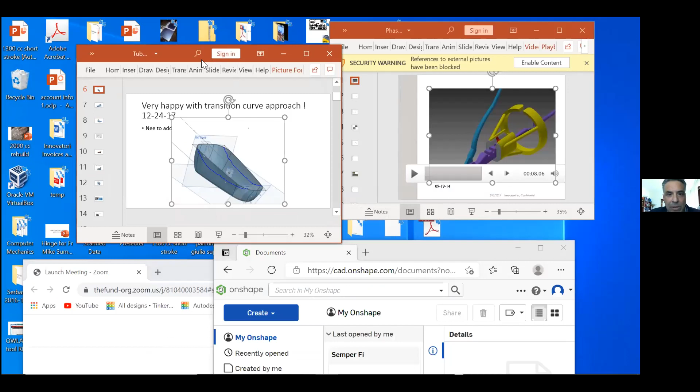backtrack a little bit and talk a little bit about what we mean by CAD design. So this is just, I think I might have shown this presentation during our last talk, but I'm making a copper bathtub for my wife. We're doing the bathroom upstairs, and I used CAD to design the bathtub.

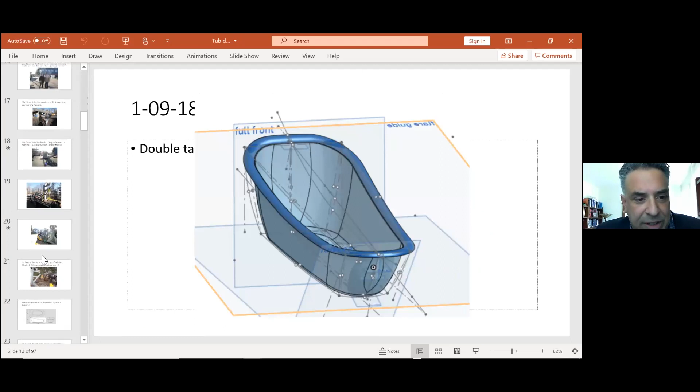I used some of the shaping. I made this 3-dimensional figure of myself to make sure I could fit in the bathtub. And then these are images of getting the design right. Some of this is pretty sophisticated stuff, but we're going to start at the beginning, so don't worry.

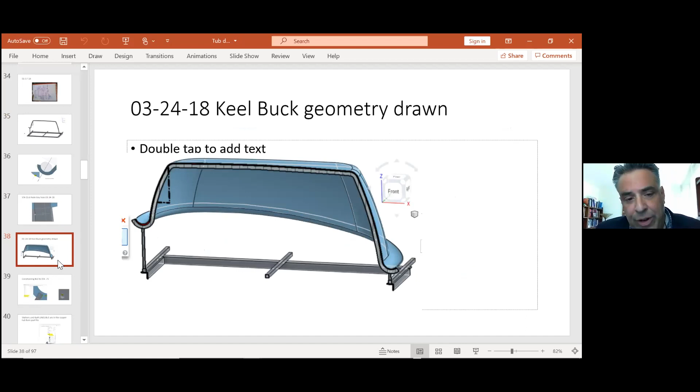I made these full-scale drawings, which ultimately led to the welding up of a frame. CAD can be used professionally, or you could use CAD for your own personal purposes to make stuff - it depends on how much time you want to invest. This is an example of a drawing. Are you folks seeing this stuff pretty well? Okay, that's just an example of getting into the nitty gritty, using CAD to augment the design process, leading to this elaborate weldment.

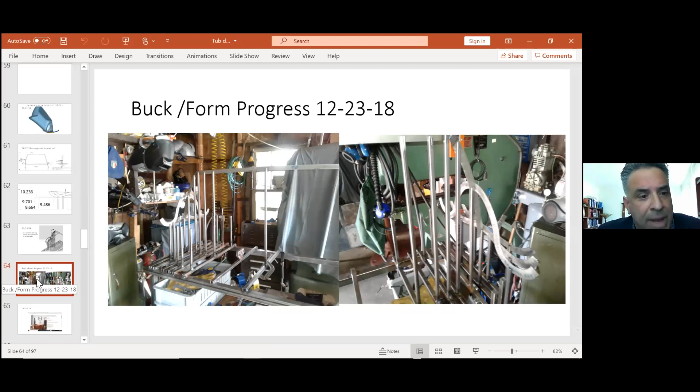Oh, and by the way, maybe in the future if somebody needs to learn to weld - Mr. Meyer, Colonel Meyer, forgive me, indicated that at some point somebody might want to make it up here to the shop to do some training. So all this is on the table. So yeah, an example of, I had an idea in mind, and used CAD to make it happen.

This is the forming of the copper and getting my son involved. So that's just one embodiment of CAD, if you will.

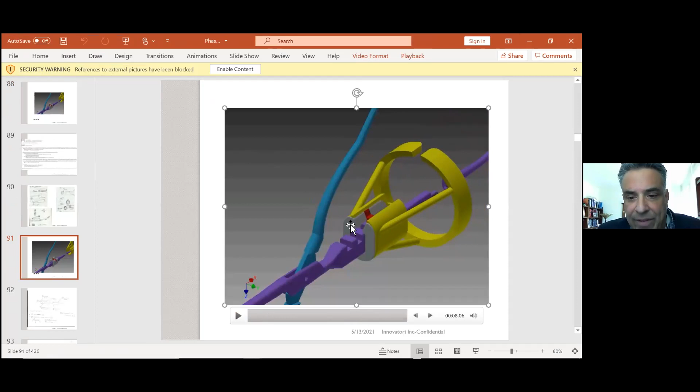And the other thing about CAD is that once you use it, you can then make neat animations. I don't know if this animation is going to actually come through as well as it is on my screen, and I may have shown this before. But the other nice aspect of designing stuff on the computer is that you then have the potential to present it in different ways to convey understanding.

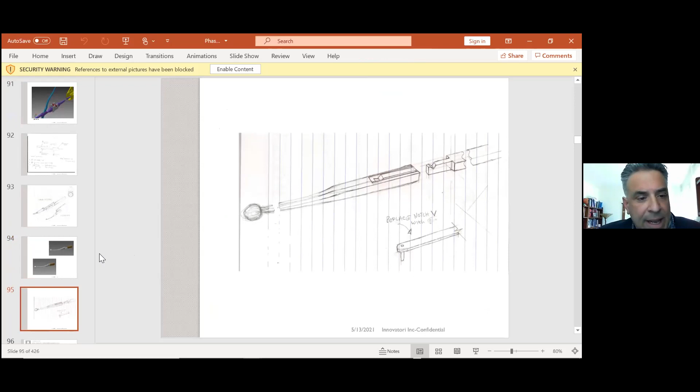John Fortunato mentioned, hey, why don't you show how you go from some hand sketches to CAD. You don't necessarily have to start with CAD - you can sketch things out from your mind's eye, and then get into CAD and make it into something that might be producible. So these are just sketches where I'm conveying concepts, and they ended up making their way into some formal CAD incarnations.

So was that a decent enough introduction? Anybody have any questions?

John Casey here. I think there's obviously you can use CAD to create just about anything, and it doesn't have to be a new invention. It can be a bathtub, something that's been done before, and it's kind of neat to be able to do that. It doesn't necessarily have to be something that makes a lot of money, or be patentable, just something that you get to create. Now there are other skills that go beyond that, but yeah.

Talk a little bit about this Onshape, if you're ready. It looks like you have it pulled up. Okay, so I imagine you see my screen here. There's this Onshape application, and I invite anyone who went through the trouble of signing up - it's a really neat application, and it's free. It's cloud-based and loads directly in the browser, so there's no installation. All you have to do is go to onshape.com and sign up for a free account.

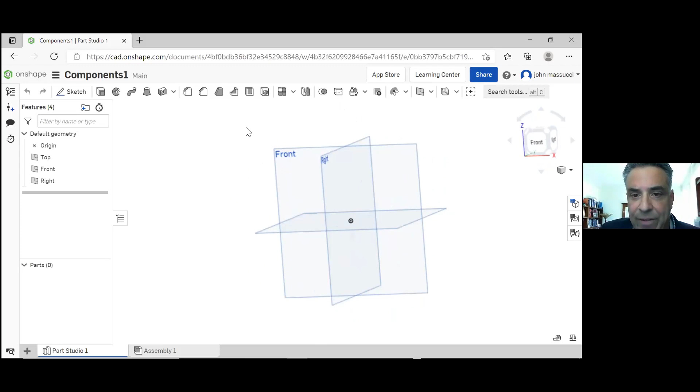Then you can click on, if you move over to the right, you can click on front and it'll automatically get you back to the front view. Then you can right click and get to this top view, and you'll see how useful this becomes.

And then the other mouse features - if you have a dial on a mouse, a wheel function, it allows you to do a zoom, just to manipulate what we're about to draw.

So in CAD, you sort of start out with a sketch and apply it to a plane, because generally in CAD, at least initially, you're drawing in 2 dimensions. So what I'm going to do is go over to the sketch function here.

Can everyone see my cursor? I'm circling around here, and I'm going to click on sketch, and it's asking me for a sketch plane. So I'm going to click the front sketch plane. You'll see what it does - I'll zoom out - it puts a sketch plane on top of the front plane.

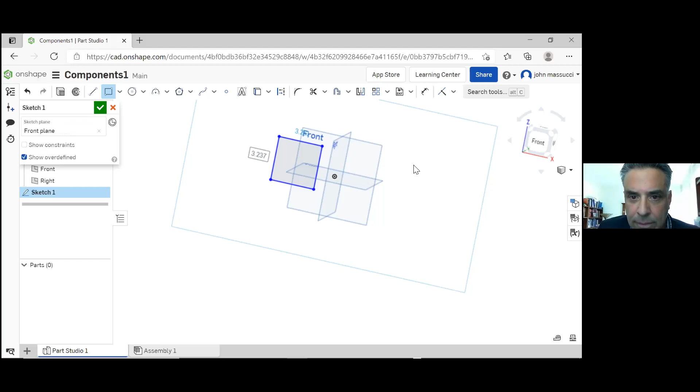So, yeah John, I don't know, maybe you were gonna mention it. There's that idea that once you're logged in, at the top on the right hand side next to your name, you've got the Learning Center and the App Store. Oh, yeah, I completely forgot about that. Yeah, we could go there right now.

By the way, we're going to step through some steps, but if you click on the Learning Center here, it'll bring you to this pretty elaborate Learning Center. My network connection seems slower than it was earlier this morning, but this is a pretty amazing spot, because you click on these, like these self-paced courses, and there's everything under the sun that you might be interested in learning.

So if there's one useful thing we can do on this call, it's to point you to Onshape, and the second most useful thing might be to point you to this Learning Center. You click on this Part Design Using Part Studios course, and it has this whole suite of videos that will walk you through the design process, discussing some of the individual part models and features.

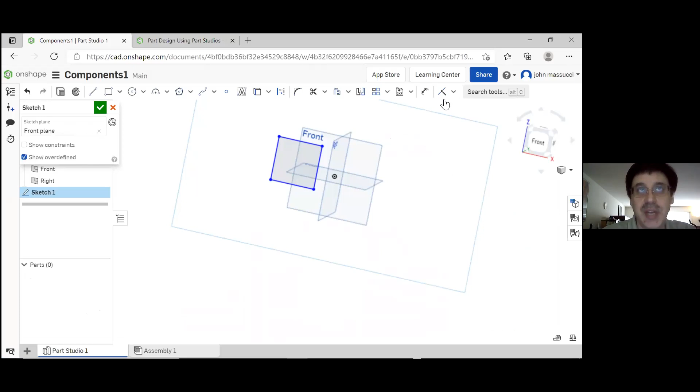Yeah, there's a lot of information there, and there's also instructor-led courses available as well. So if you're looking for some assistance, it's probably available within the Learning Center.

And so if we could then jump back to where I am here. Using your mouse, to center, if you ever get kind of lost, you can always click front, and that'll zoom everything to where you need it.

And then just remember, I have a couple button mouse, but it's just a simple right click that enables you to rotate. If you get into this front view, I kind of always like to look from a perspective standpoint.

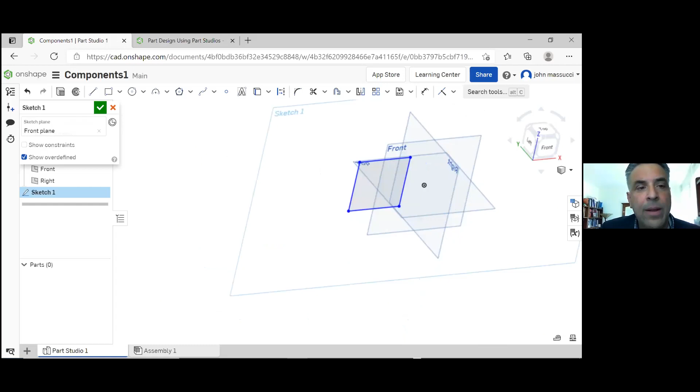Okay, so we drew this square on the sketch. The first thing you might want to do when you have this basic geometry is to add dimensions to it. So I click on this dimension icon - it looks kind of like a dimension - and then I select the line that I want to give a dimension to, and it'll pull out. That's the dimension that defines the square I drew.

But when it's highlighted like that, I can make it whatever dimension I'd like. So I'll just say I want to make this 3 inches. And then, while this is still highlighted, the dimension icon is still active, I can click this and make it into, maybe we'll call it 3 by 5.

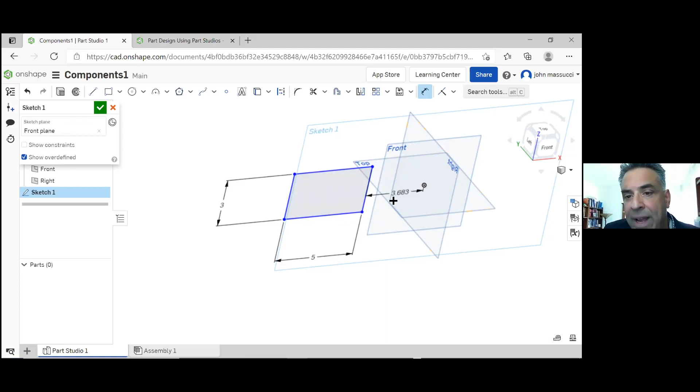I can unhighlight the dimension box, and I can move this in the direction that I would like to move it, by picking different pieces. And I can add some dimensions to locate this cross section. So I could dimension to this fixed point, which may ultimately be important at some point.

John usually explains this much better than me - he was pretty good at it earlier this morning - but I'm basically establishing the location of the cross section to a zero point, so that if I come back into the sketch, which we'll see, I can change the dimensions and the shape will react in the way that I expect.

Okay, so you notice how what was blue is now all black, and what that means is that my sketch is fully constrained. I have a fully constrained sketch, meaning all the dimensions are there, and the sketch makes sense. So then I can click my green arrow and say that I'm done.

And what I've done is I've added to my design tree over here to my left - I've created this sketch, and it's called Sketch 1. I could right click it and rename it, and I could call it 'sketch of part'.

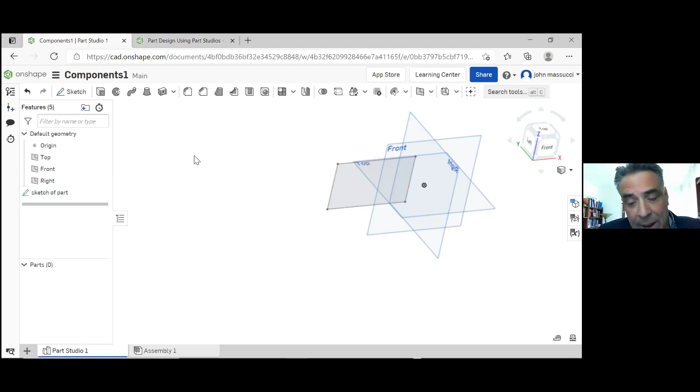Okay, so you've got this sketch now. Here's probably one of the most fundamental aspects of CAD: the ability to take a sketch and turn it into 3D. When you mention CAD these days, there was a time when everything was still 2D, like architectural drafting, but today when you say CAD, they generally mean three dimensions.

So we select this extrude tool, and this dialog box opens up. Further down the line maybe we can get into all kinds of exotic surfacing and what all this stuff means, but fundamentally we want to make a solid out of this cross section we've created. I'm going to select the cross section, because the box asks for faces and sketch regions to extrude, so it's asking me for a region that I want to extrude.

So I select that region, and you'll see it's giving me a premonition of what it intends to do. I can change that, I can flip the direction if I'd like, I can change the depth. I can say I'd like this to be on the order of 5 inches, and I'll hit enter and it'll update by extrusion.

It gives me a bunch of options which I'm not going to go into right now because they're not all that important in an introductory class. But for instance, I could select draft and give it some value, if I was making a cast part and needed to include draft on all my bodies so they could be removed easily from the mold. That's just an example of some of the options they give you, but in this instance I'm not interested in including any draft.

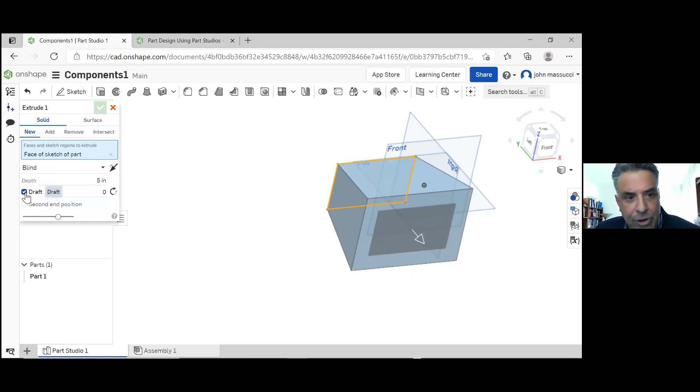So I'm done, I made this simple part. I've extruded it, and it's in my document called Components 1, and here it is, and I can rotate around. Anybody have any questions? Have I lost anybody? Anybody want me to go back?

There's been a few questions and comments in the chat, and I'm taking care of responding to those. Oh, that's awesome, I'm not sure why I don't see it. You have to pick the chat button and it pops up and then it'll be shown on your screen, so you're probably better off just leaving it minimized. Okay, great, that's good because I'm on this little tiny surface screen.

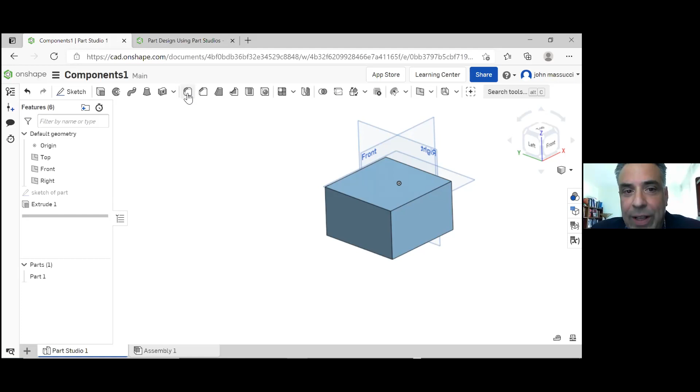Okay, so I've got this extrusion. Big deal, you drew a box and you extruded it. And that's great. Now there's a whole suite of options you can do with this solid. For instance, I could just click this fillet button and select these edges, and it'll put a fillet on the edges. That might be really important if I'm designing, say, a cigar holder, and I want to put some fillets here, and eventually we're going to put a cavity in this thing.

So there's a bunch of options which we'll at some point go through. When you play around with it, you'll see what they do. I just wanted to add some additional geometry, and then when I'm done I'll just click, yeah.

Let me point out, in this design tree you'll have a list of all the things you've done, and you can always go back and change things. I can go back to this extrusion, click on it, and it'll come up, and I can always change it. That's one of the beauties of CAD: I'm not constrained to what I've already done. I can always go back and change things and shapes. I can go back to this fillet radius and change it from 0.2 to 0.7, and there you go, I can update my design.

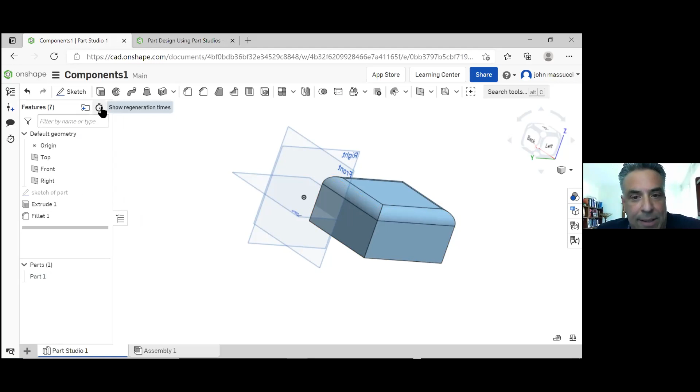Let's say maybe we want to add a hole to this shape. So I go back to my sketch function and select this surface that I intend to put my hole on. Now I'm in the sketch selection mode, and since I'm in sketch mode, this pull-down bar has the options I'm generally concerned with when drawing sketches.

I'm going to select this point and try to locate it. I'm going to put this point somewhere—I'd like to put it in the center. The one thing I can do is, well, let me not, I'm going to try to just keep it simple here.

One thing I can do before I put the point down is use some of the existing geometry to locate the point.

So I'll click on this icon, called project, and what it'll do is project these lines onto my sketch so I could use them to reference the center. Hopefully that makes sense.

Another thing too, right John? You can project anything from within the sketch. You could project something on the bottom of your current block, even if you had another piece of geometry, you could project that. You're basically just projecting some geometric edge or surface back to the sketch plane.

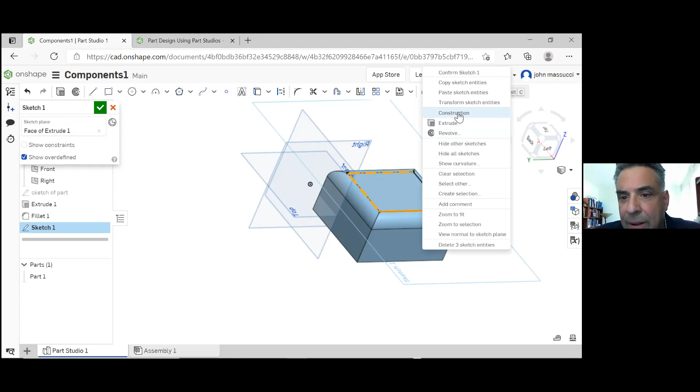I could potentially be complicating this concept a bit, so forgive me, but I just projected some existing geometry and then right-clicked them and turned them into construction lines, so that when I extrude later on to make the hole, they don't end up becoming part of the geometry I'm really concerned about.

But now I want to put that point in the center, right, so there it is. And then what I wanted to do is make sure it was in the center, right?

So what we're going to do is constrain it in a vertical sense, right? This guy, and the midpoint should just pop up, but no, it's not.

Okay, so what I'm going to do, you have to put another point at... yeah, I was hoping to not have to do that, but okay. So I'm selecting,

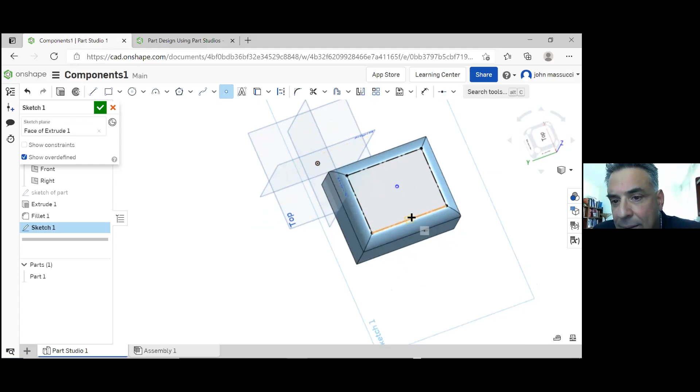I'm going to put another point here, in the middle. So I'm highlighting this line and putting a point there in the center. And that's now, if I show my constraints, this is telling me that this point here is in the center.

And then I can constrain vertically this point to this point, and that'll put— you probably wanted to go horizontal, John, because you're— yeah. Hold on, just undo that. Yep, yeah.

I hope there's a simpler way to do this, but anyway, so I'm putting two points on these construction lines, and I'm ensuring that I'm getting to the center.

I probably should have just put the hole in without worrying about constraining it to the center, but maybe this is useful, so I'm constraining it.

So now what I've actually done is geometrically constrained this point to the absolute center of this guy.

Maybe I'll be apologizing too much, there's probably an easier way to convey this. But anyway, what I wanted to do was put this point and force it.

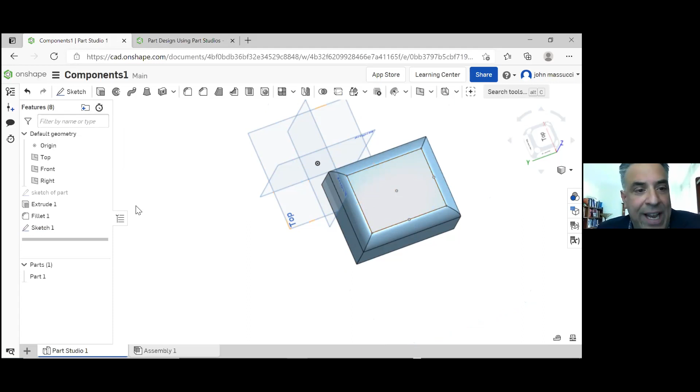So now the thing I can point out is, because I've geometrically constrained this point to the center, if I go and change the dimensions of my object, if I go back to the original sketch and change this dimension to something other than what it was...

So if we can make it 2, let's say, right? And then I go back and you'll see that, okay, but you notice how that point stayed in the center.

And so that's a very useful— that's like one of the most important things to convey about designing in CAD, that you can set up these relationships that are core to your design, and then go in and tweak the design.

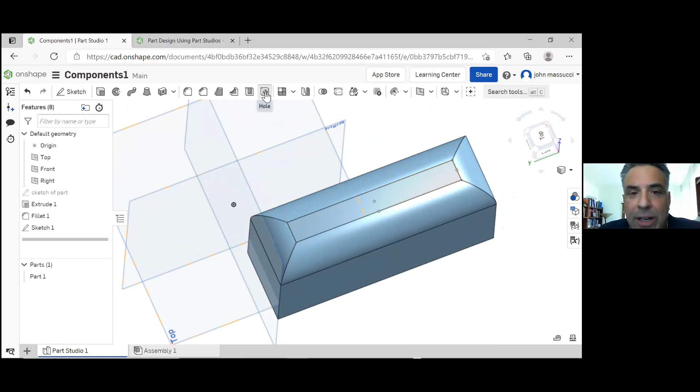Okay, so we started out wanting to put a hole in the center. So I'll click on this icon now, and you can see down here it's asking for a sketch point to place the hole.

So I'm going to select the point that I intended to put the hole there, and I'll select it, and there you go. It put this— it's expecting this kind of bolt or screw geometry, and I can change that.

Right now it's asking for a clearance hole. It could be a tapped hole, it could be a simple drilled hole, which I think only limits the options for drill sizes. But we'll call it a simple clearance hole, and it's got this geometry, so we'll leave it at that.

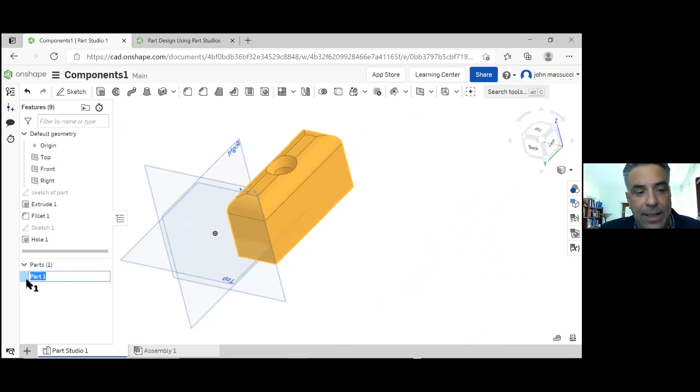So I've created my part. I put a hole in there. I'm going to maybe bolt that together. Right now I'm in this document called components, and I've created my part. I could rename this. Any ideas? We'll just call this bracket. Bracket 1, maybe, okay.

And then I can create another part. For simplicity's sake, we'll create something cylindrical and we'll constrain it at some point, because we're going to make an assembly. Right now we're creating parts and they're ultimately going to end up in an assembly. So we'll go back to our sketch tool.

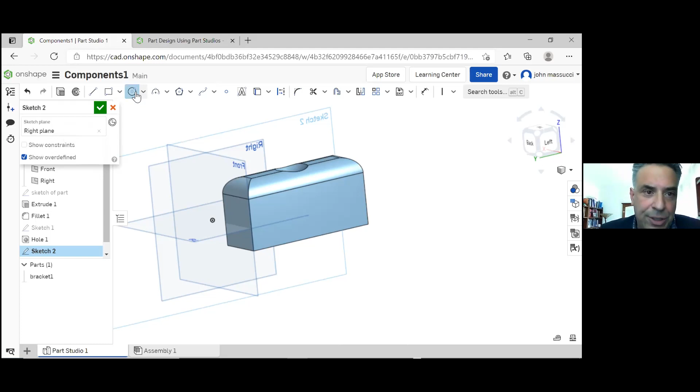Okay, and I'll select a different plane, let's say, and select this, and then I'll select my circle tool. I'm now in the sketch and I'll put a circle somewhere. Okay, and then I'm going to go over to my dimension tool here again, and I'm going to put my dimension here, and maybe make this a 2-inch or maybe 3-inch diameter circle. And I'll click OK.

And I'm going to extrude that again. And I'm going to select my circle. And now I've got this cylindrical looking device. I can flip it. I can change the depth. Whatever I want to do. And then I can click OK.

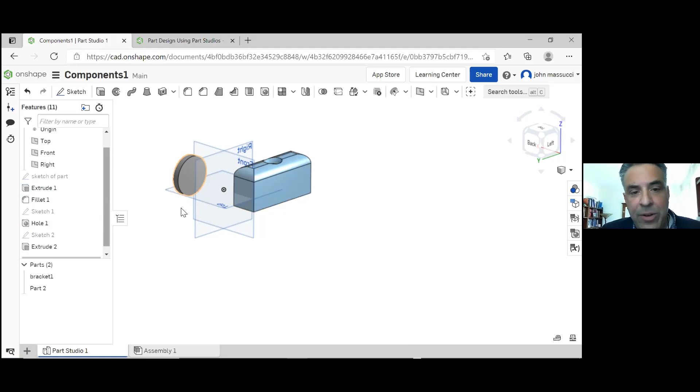Now, if you notice, my tree here on the left, my design tree, has all the different features that I've done. And at any point, I can go back and change things. But notice now I have 2 bodies. I named one bracket, but because this cylindrical disk is a closed volume, the CAD software recognizes it as a separate body.

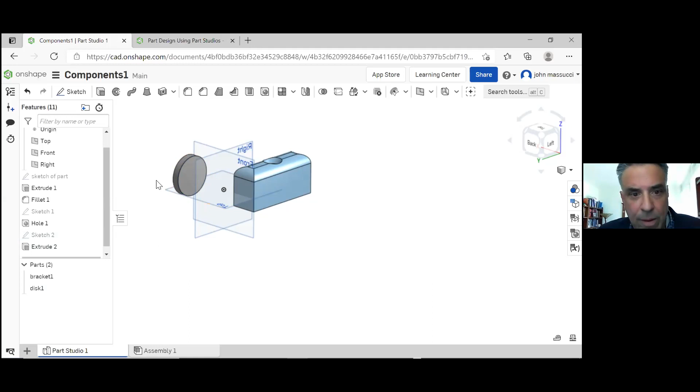And I can click on this and rename it, and I can call it disk, disk 1 maybe. And if I wanted to make this into one piece, let's say, I can highlight the body. Let me hide the sketch.

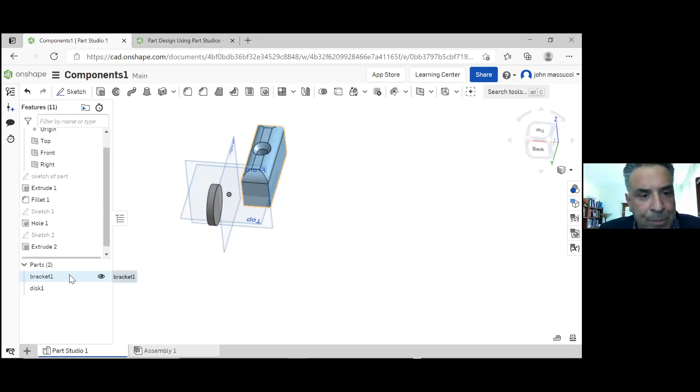What I'd like to do is move the sketch into position where it's likely to intersect. We'll go back to the sketch, and I'm going to move this guy over a bit, and then hit OK. And I'm going to just demonstrate a feature.

I'm going to go back to the extrusion. I'm going to make it a little bit longer, maybe flip the direction, and make it 1 inch long because I want it to intersect my geometry. Let's see, is it going to intersect yet? 1 inch. Maybe make it a little bit longer just to make sure.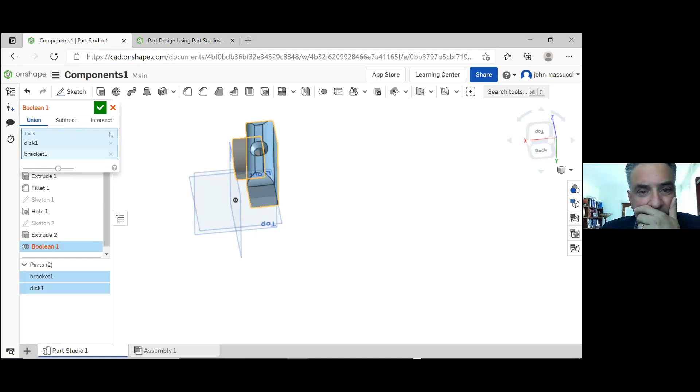I'm going to make it 2 inches, let's say. Okay, so it's clear that these 2 bodies are intersecting each other. You can tell, see that in the hole, but they're 2 separate parts. I can click here, go to this Boolean feature, and then choose a union. And so I can union these guys together, and now it's 1 part.

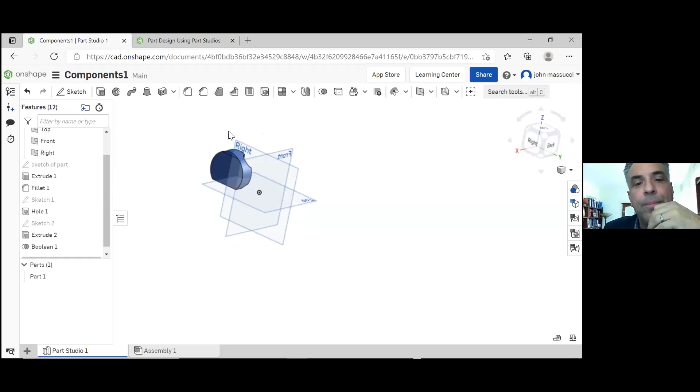See, now I went from 2 parts, and it's effectively 1 part. Just to conceptualize, what I could also do is a subtraction between those 2, or maybe even better, an intersection. Isn't that interesting? So it's kind of an interesting concept, this Boolean operations, where I can create a single part that's a function of two different parts. It ends up becoming really, really useful. And these things become quite familiar to you as you're using CAD.

But I'm going to delete this feature, and you'll see I'll go right back to my two parts. And I'm going to turn this back to only 1/2 inch in width, because really what I want to jump to now is getting to an assembly, because now I've got my two parts. I've got a disc, and I've got this other geometry, if you will. And so I'm in this part studio.

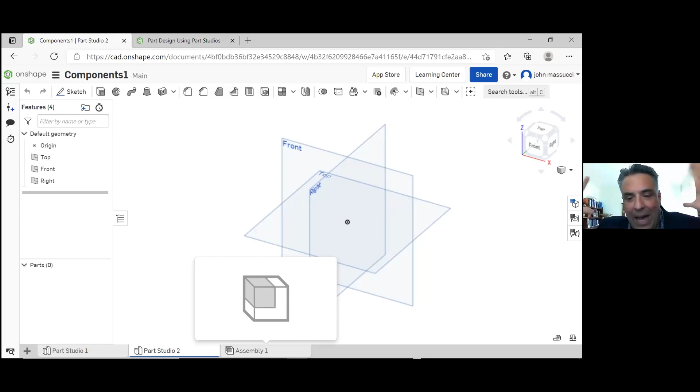I could add other part studios, right? I could create this other part studio, and you'll see that it'll bring me to this blank page. So there's Part Studio 2 and Part Studio 1, and there's assemblies, and then there's the components. One thing about Onshape is that it's very wide. You have a lot of ways to think about how you want to structure your design. That's a little bit of a more advanced concept, so I'll just throw that out there, that you've got these part studios, and we're going to get to an assembly. Then you've got this components that has a couple of parts in it. And then you've got this folder that could have a number of components.

So, I don't intend to confuse anybody. I know I'd find it confusing myself if I hadn't been doing this for a while, but I don't find it confusing anymore. Initially it's like, wait a minute, I can have components in a folder, multiple folders, multiple parts in a part studio. The most important thing is not to worry too much about that. Onshape, in contrast to other designs, makes things much more flexible.

Other programs have assembly files and part files, and that's about it. In some ways that makes life a little easier, but as you get more sophisticated, you can do funky things like share parts and features, join them together. I've got gears with tooth profiles I want to borrow from, and it gets really interesting. You'll find the method that works best for you.

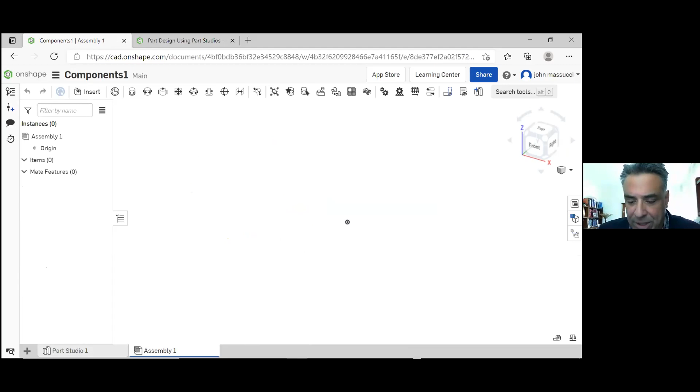Many times, let's say somebody's designing something like a piece of artwork with some kinematics and movement, or you just want to put something together - maybe it's two parts and some bolts. The reason I'm stepping back to call attention to parts and assembly is that it's a fundamental language to CAD: I've got an assembly and I've got parts, and basically the process is to insert your parts from the stuff you've created.

By the way, when you're in Onshape, you never have to worry about saving anything, or where the stuff is. It's just always there, always on the cloud. It's one of the most beautiful things about Onshape - you never worry, did I lose it? Did I lose that configuration from 3 days ago? Did I save it in the right place? It's just always there. It's a really wonderful feature.

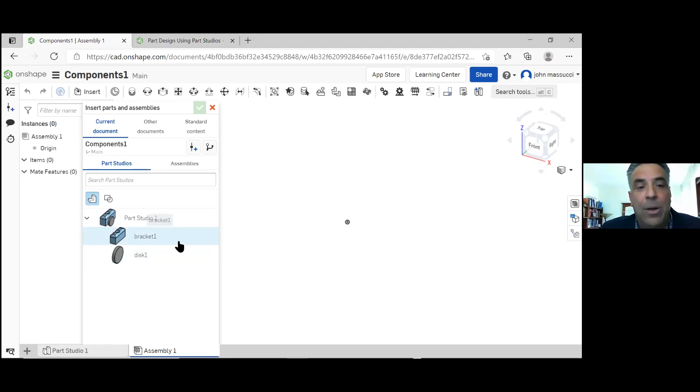But anyway, getting back to the assembly, I'm going to insert the bracket, and click OK. So now you'll see I'm in this assembly, and I've got this bracket. I only have one, but maybe I want to insert it again because I'm going to use the bracket twice in my assembly, and put this guy here. Okay, so now I've got an assembly, and I can rename this, right?

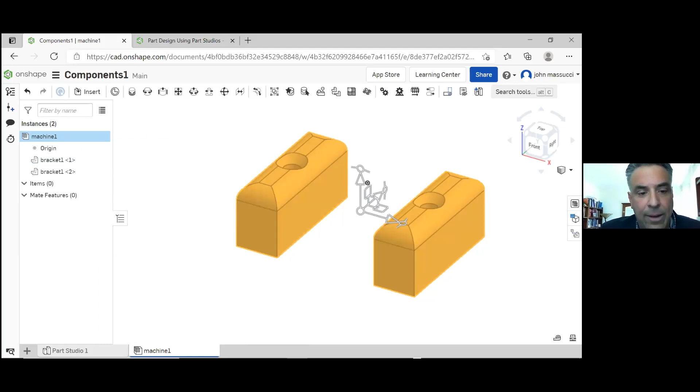I can call it - we'll call it machine one, right? And you can see the name updates here below. And I can always go between my part studio, where I've generated my parts, and my machine one assembly.

So now what I want to do is orient this other part so that it's sort of in a mating relationship, because I'm going to put that cylindrical piece in the center. So what I'd like to do is mate - I'm going to fasten.

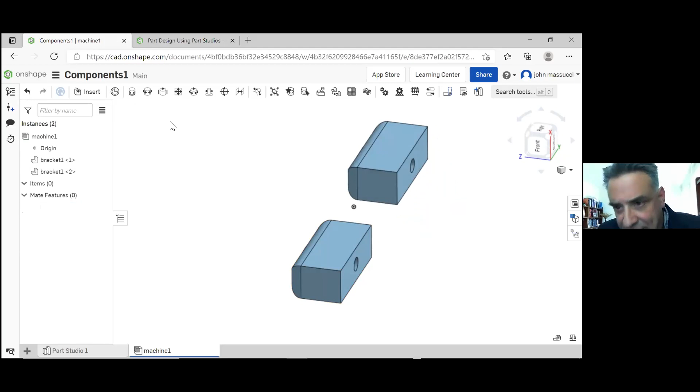Actually, before I do that, I'd like to show that these are not constrained. So I'm going to be adding some constraints to my assembly so it goes together the way I'd like. But before I add constraints, I want to point out that I can move these things any way I want, because they're not constrained - I can rotate this stuff and make animations, because right now they're just sitting in space, constrained only to the space we're working in.

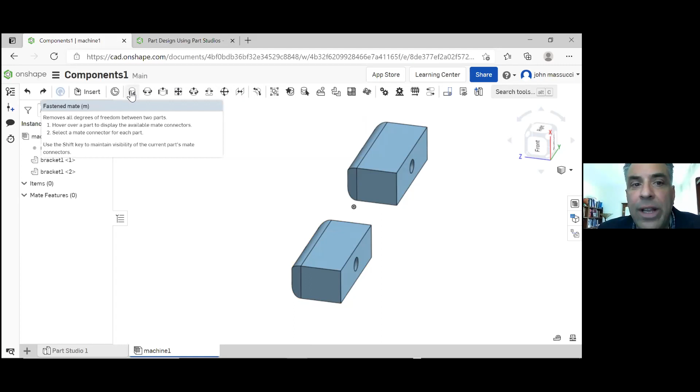Okay, but I'd like to constrain this face, geometrically speaking, to be parallel or opposite this face. To be honest, it takes a while to understand all these constraints - there are a lot of great videos on it. When it's been a while I tend to forget how each one operates, but let's hope I get it right. I basically want to constrain this circle here to this one.

Notice how it put it exactly where I wanted, but not quite oriented the way that I need it to be. So I click this arrow and it creates that mirror orientation that I was looking for. So that's pretty, right?

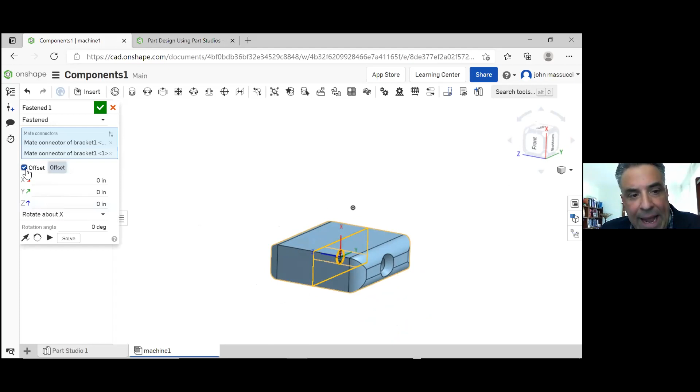Now I've got this roughly the way that I intended it to be. However, I need them separated. So I'll go back to this fastened constraint and click this offset, and I'll see this blue arrow here. That blue arrow says Z, telling me that's the Z direction, the X, Y, Z in my three-dimensional space.

So I'll go over to Z and put in some number like 3 inches, and flip it so that... let's see, one second. I've got to put -3 there, right? And then I'll flip it again. Fasten, -3, and flip that, and then we should be good.

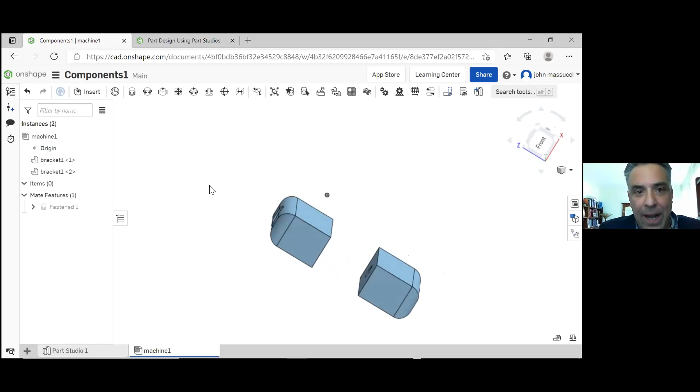It definitely will take time, when you work with constraints, in your mind's eye it may seem, hey, all I want to do is arrange these parts, but getting the constraints to behave the way that you want takes some playing around. They've done their best to kind of describe how these constraints work.

So now that these parts are constrained to each other, if I click on the part and try to move them, you'll notice they move together, because they're constrained. So if I click this arrow and move them, you'll see that now they kind of move together.

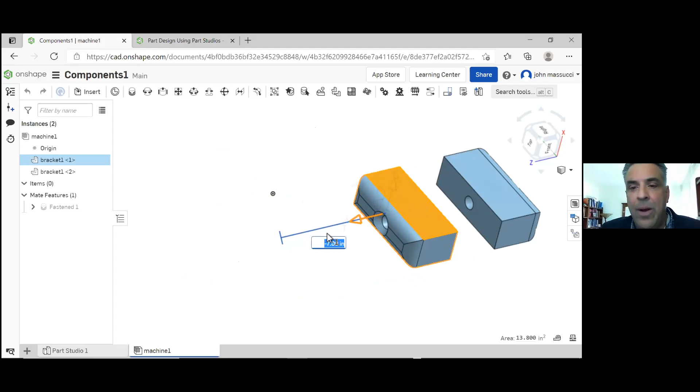If we were on site, in some kind of classroom, which hopefully one day that might happen, or if you were here for a week or so, I could be looking over your shoulder and helping you along the way. But we're doing our best here with Zoom. I'd suggest going to the Learning Center and doing the making a part, making an assembly exercises, and if some concepts are still eluding you, we can probably schedule some subsequent Zoom calls to go over questions or direct contact.

So here now, we also made this disc. I'm going to insert this disc into the assembly, okay? And I'm gonna just use one of them for the moment. I'd like to put this disc, let's say, in the center here, in between these two. So I'm gonna try to make it simple for myself.

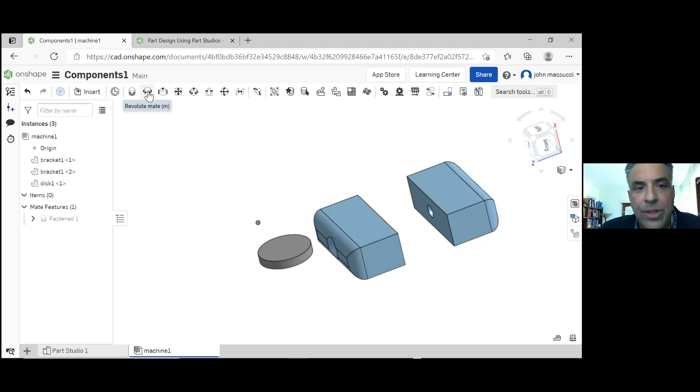I think if I use this revolute, that gives me an offset. Does that give me an offset? Yeah. So I can select the center of this, select this circle, and select this circle. See, it'll put it concentric with that circle, and then I can give it an offset of maybe 1.5 inches, and that should put it in the center there.

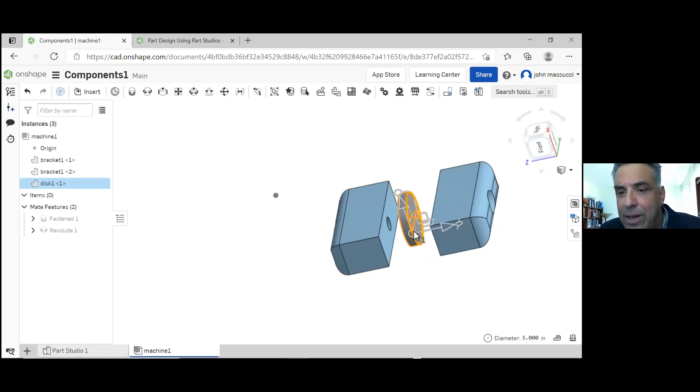Okay, and maybe there's a shaft that's going to go... so now I'm in this assembly, but let's say, oh, I forgot to put a hole. I can click on this, double click on this guy, and maybe right click. And I think there's an option to...

See this option, edit in context. So I can click this option. Don't worry if you don't follow it right away, but I can edit. So what I'm doing is editing this part in the context of my assembly. And I can throw a sketch on there, because now I know where my hole needs to be, and then project this geometry from this other part.

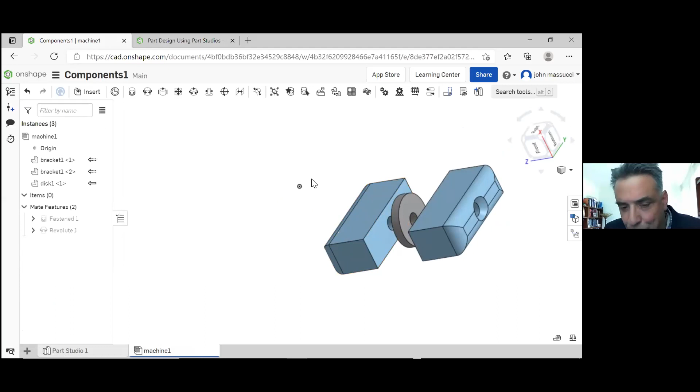See how it puts a circle there right where I need it, and then I can actually put a hole there, and I can remove, and click OK. I'm going really fast, don't worry about it. Then I can go back to my assembly, and you'll see it ends up being a really powerful feature. While I'm in an assembly, I can locate other geometry that's pretty important to what I'm trying to achieve with my assembly.

Okay, so I've got this pretty simple assembly. I might want to add a couple of fillets. One thing I'll point out is I can still move this assembly all over the place.

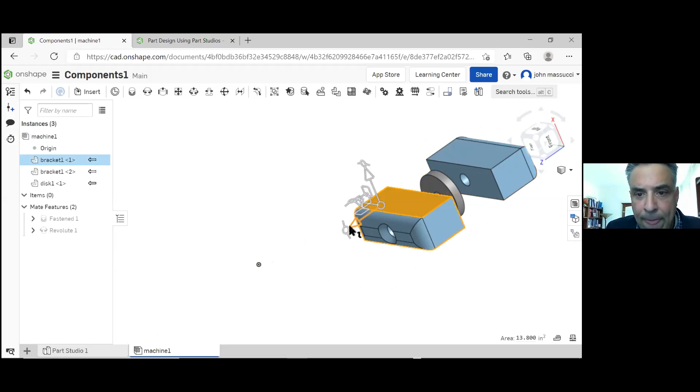That's interesting. Oh, because I'm back to the assembly. Oh, there was just too much of a delay.

So the point I was just trying to show is that this assembly is not yet really anchored to anything. The other option you have, and it's not the most important thing to show at this moment, but there may come a time when you need to fix a part so that it's constrained to ground, if you will, effectively as if it's constrained to earth.

And if you notice, I selected, and it puts this ground feature next to this part. And now I can't translate this part anymore. No matter what I do, if I try to rotate this part, it doesn't move anywhere.

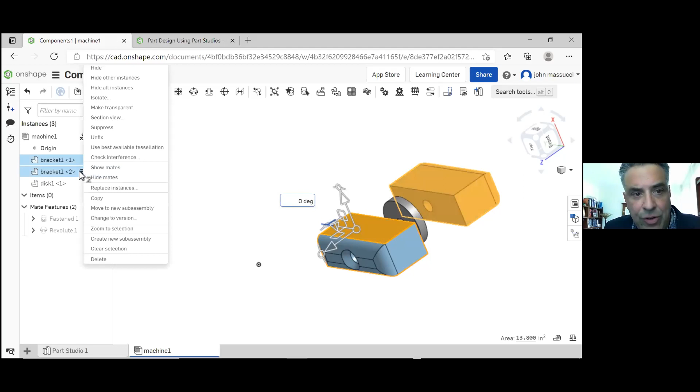But if I was to remove the fixed constraint, if I click unfix and I clicked on it, you'll notice that I can rotate, I begin to rotate this thing. Just a point of,

now we're going to get into, well, okay, now that, okay, John, you've showed me how to make a couple of parts and put them in assembly, big deal. I'm going to learn this in a couple of hours.

So now what we're going to do is we're going to go into the drawing piece. John and I are trying to give an overview. Here's your software application. You have something in your mind, you might sketch it. You start off trying to create the geometry, then you put it together and constrain it if you want. You don't have to use constraints, you can just position it. But the constraints, as the assembly gets more and more complex, become more and more useful.

But then you have to make drawings, because you know what, you're going to send these parts to a machine shop, or you're going to be machining these parts in your garage. So the next step is to go down to this bottom bar here, click the plus sign, and then create drawing.

There you go, right? You're going to create a drawing, and there's a whole bunch of drawing standards, ANSI, ISO, sizes A, B, C. The A is typically the smallest standard size drawing you can make, so we'll just stick with that for now, but you can play with that. They have all different kinds of drawing templates, but let's just stick with the ANSI A.

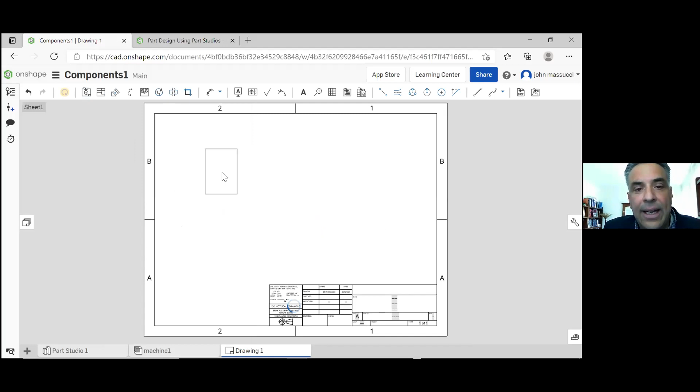So initially what we're going to do is click our bracket, and we're going to put a view here, and it's going to create that view, and then it's going to allow me to create another projection view, which is the side view.

Okay, and I might want to move these views down a bit, because I'd like to then create this other one. So I'm selecting this projected view option, and I'm going to highlight this view, and pull it up here, and it's going to give me the top view that I'm looking for, because I'm going to need to call out that geometry in order to make the part.

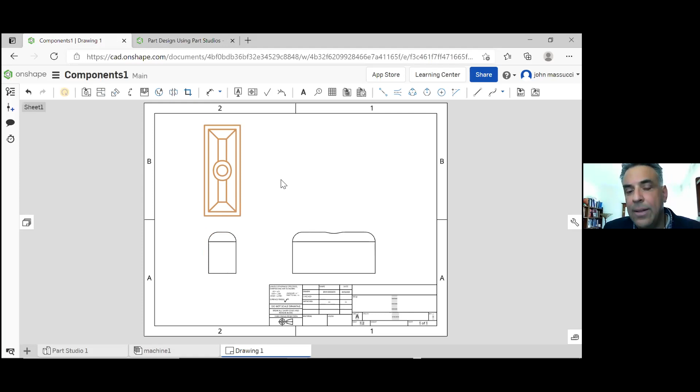Does that make sense to everybody? Am I going too fast? Do we want to take a break to catch up? Any questions? John, great, this has been great. I think I see all these questions and links, and people are engaging with John F on the chat side.

Yeah, it's great. It's so very fortunate for me, because I don't think I would be able to respond to the text and keep my thought process going. So it's great that I've got John Fortunato here, that we're working together on this.

This is working out much better than well, and so just to take maybe a 30-second break, what I was thinking about while you're going through this and watching you design the box and the wheel, I mean, I've never seen anything like that. But you think about everything you use every single day, from a flower pot. Somebody had to think about how high did it need to go, how deep, what was it made of, and all of those things you can get into at another time. But the one thing I was thinking about, just to give us a mental break and say something cool about you, is if you don't know, John Massucci's everyday car is a 1931 Model A.

Model A Ford, suicide doors, beautiful car. After you sent me the picture, I said I got to have one, but I don't make that kind of money. I can't fix it, and I don't know anything about cars and fixing them up. It's just a cool car.

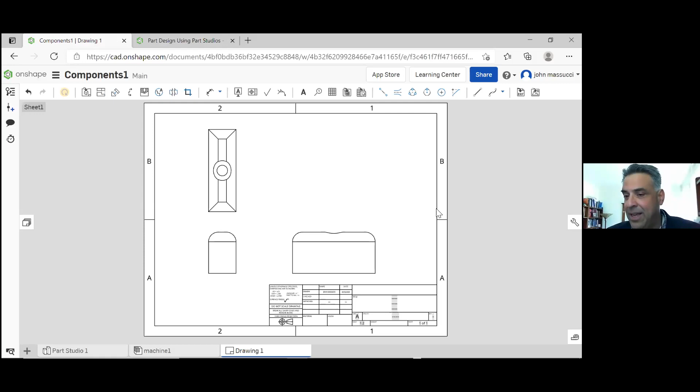And Casey, that's a really excellent point. Sometimes CAD can be this complex thing. It can be very helpful, but don't let it stop you from sketching your ideas on a piece of paper with a pencil. That's a really great point you're making.

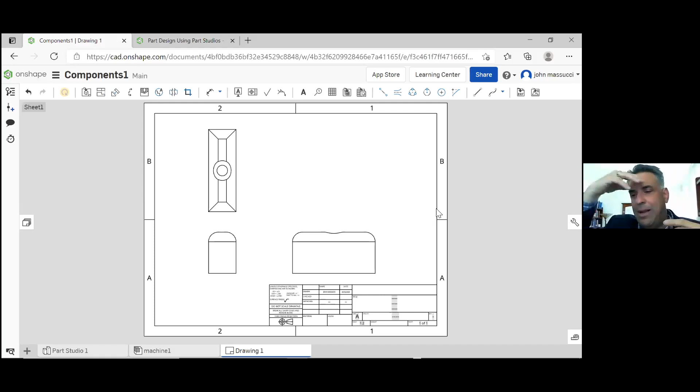I find there's lots of people gifted in these ways, and all they have to do is start drawing, and all of a sudden they find out they're talented at it. You could just draw freehand, and maybe that's another class for the future - how do you begin to draw freehand in 3 dimensions? Is this a worthwhile thought for you to spend some time on, Casey?

Even before getting to the stage of CAD, you see something in your mind that you think would be a useful tool or piece of equipment in the marketplace, but you have to find a way to get it onto something physical. Maybe the next step is talking to someone in the lawn mowing business, and if I was to create a prototype - there are stages to the development process, and you inventors go through that all the time. This stage takes the idea from this floating thing and shrinks it into something semi-tangible that can be produced in a manufacturing plant.

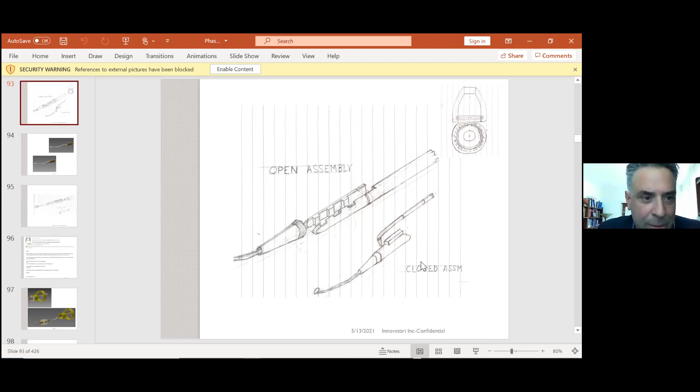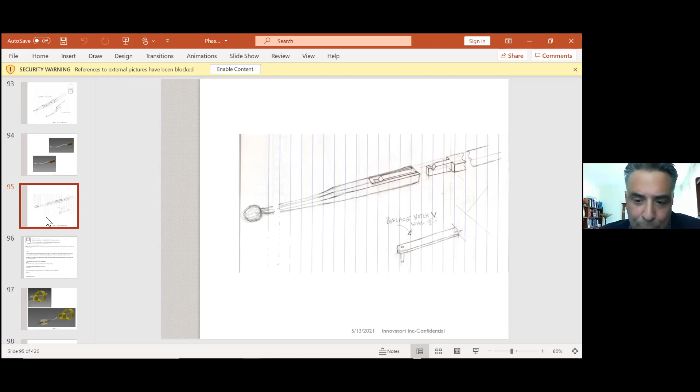Just continuing that thought - when I was working for Sloan Kettering doing medical instrumentation design, I had these different concepts in my head. I said to myself, there's no way I could sit down and convey these concepts to my customer without making a choice. I'm a busy guy - I could do it in CAD, and I'd eventually have to do it in CAD anyway, but I could invest all that time putting it into CAD twice, or sit down for an hour and just sketch it out to convey the concepts. Even in the world of digital, it can be very efficient to just do it the old-fashioned way.

Sometimes when prototyping, instead of drawing all of it, you'll draw only some of it, then quickly go into the shop and weld it together because it's quicker. There are perils with that, because when you're thinking and drawing, you're helping yourself avoid welding something in the wrong spot. Changes needed due to errors with physical components end up being much more costly than having to erase a line and redraw it.

So again, from the Model A Ford and American ingenuity - my uncles were involved in World War II and also World War One. My great uncles and other family members used to always say to me when working with me underneath the cars, hey, we won. The American Jeep had like 4 or 5 bolt sizes, as opposed to the German Jeep in World War II that had like 25 bolt sizes. They used to say we won the war because the way the American engineers worked was keep it simple, keep it simple, stupid. You see that in a lot of American stuff - it tends to be robust, less complex than some of the stuff coming from over the pond or from Asia.

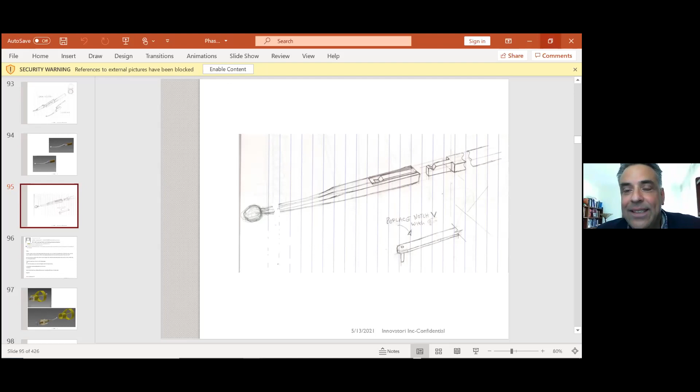I take a lot of pride in that Yankee American ingenuity kind of piece. So thank you for giving me an opportunity. Well, John, what's that adage of it's not how much you can take out of it and have it still work? Well, Einstein said, make it simple, but no simpler, right? That's not quite what you're trying to say, but yeah. So that was a nice, interesting opportunity to get into some of the design philosophy.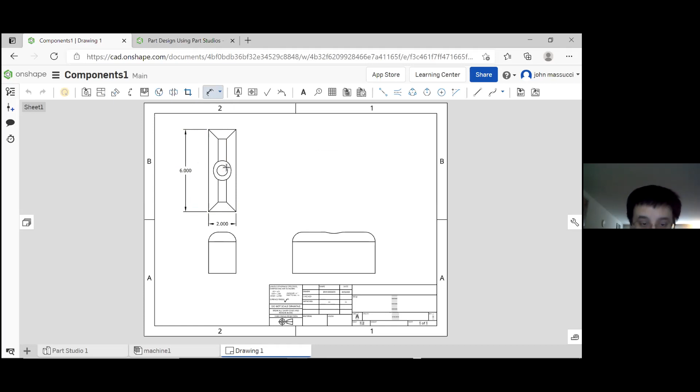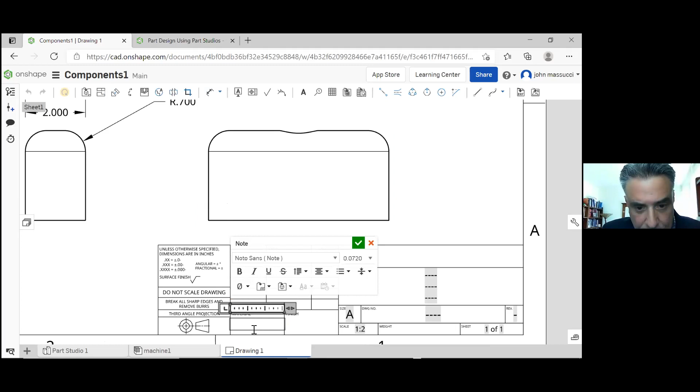So while John was talking, I'm adding dimensions to my drawing by clicking on this dimension tool and highlighting the geometry I'm looking to capture. A machinist would look at this and say, yeah, okay, I got it. Let me go down to my title bar and see it tells me to add the material. I'd get out of the dimensioning tool, click on this, and it'd give me the opportunity to put in a type of steel - maybe 4140 chrome moly steel.

And that would tell the machinist, right? Then I would tell him the kind of finish that I wanted on there, and maybe this would tell him the kind of tolerances that I expected. A lot of this gets a little more sophisticated than what I'm intending to do here in an introductory class. But we would give this a title block.

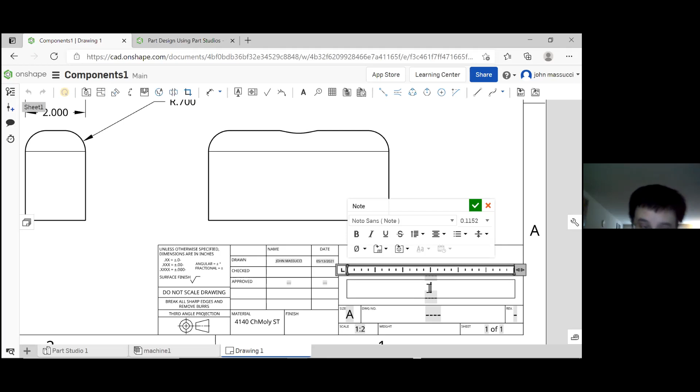Usually it's all in caps. This is just a component, not an assembly, so we'll just call it - whole block, block with hole or something like that. I don't know why I got stuck on that one - just kind of hit it square in the jaw with that one, right?

All right, so anyway, we've got the drawing named, we've got some dimensions on there. John, I would just mention, it's probably getting into the minutia, but you would set your dimensions based on the necessity.

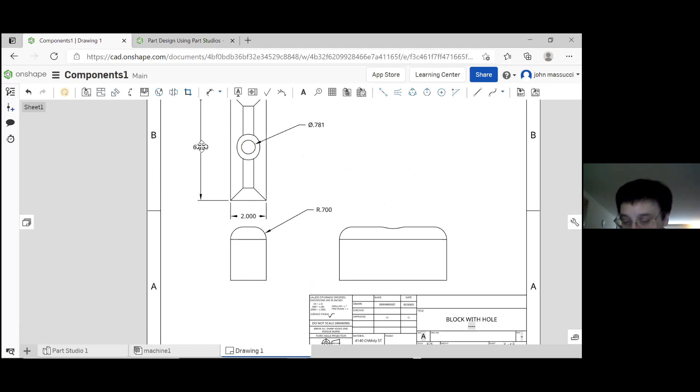2.000 might not really be what this block needs. You may only need 2 decimal places or 1 decimal place, because the more zeros you add, the more expensive it's going to be to manufacture. So I might want to just call this out with just 1 decimal point - say this is 6.0, and then go down to your tolerances, and anything that just has 2 numbers, you could add your tolerances to it. Getting a little into the minutia, I think - that's like another class on tolerancing.

We could spend 2 weeks talking about tolerancing. You were going to touch base also on geometric tolerancing, but that would be a whole other class, so it doesn't make sense to get into now.

I can change my view properties, and right now it's not showing any kind of hidden lines, but I'd like for it to show them. I'm wondering if maybe I picked the wrong selection box. It should be here.

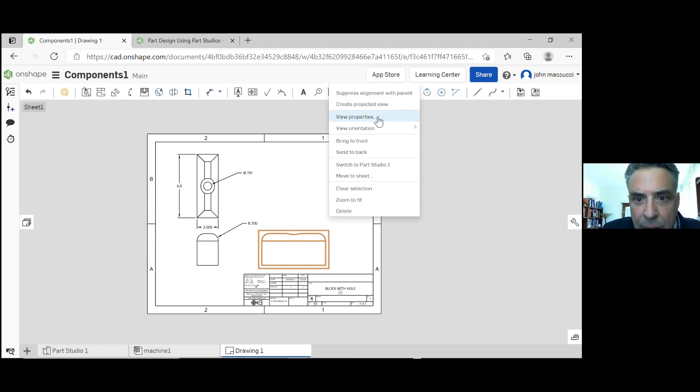I'm surprised I forgot where this is. View simplification might be it, right? No, it's not, they may have changed it. Give me one second, guys, I'll figure this out. Let me open this up. This is the right top.

This view, right click, properties, and I should be able to show all the hidden lines, but it's not working. Let me try one more time. Oh, here we go, view properties, show hide sketches. That's really weird, it was in here for the longest time. Orientation, best performance, tangent edges, solid, phantom, sheet.

Huh, interesting, I'll have to dig that up. Typically you would want to show the whole geometry here, and it's really going to bother me that I can't just find it. I'm looking into help to see if I can find it for you, John.

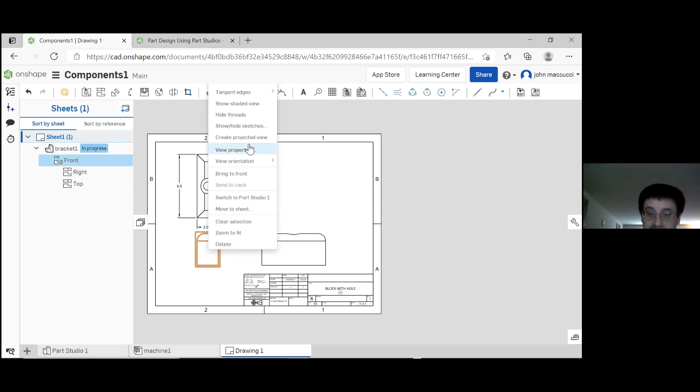Oh, modifying views, here it is, modifying views through the right mouse button. So you might want to right click on that and then do show hide hidden lines. Tangent edges, hide threads, view properties... right, oh, it's not. Maybe you have to select the... there you go. Oh, it's not letting you. Okay, well we'll figure it out at some point.

It's really one of those things that it's probably as soon as I get off, you'll find it. I'll find it as soon as I... it's interesting, but okay, so that pretty much...

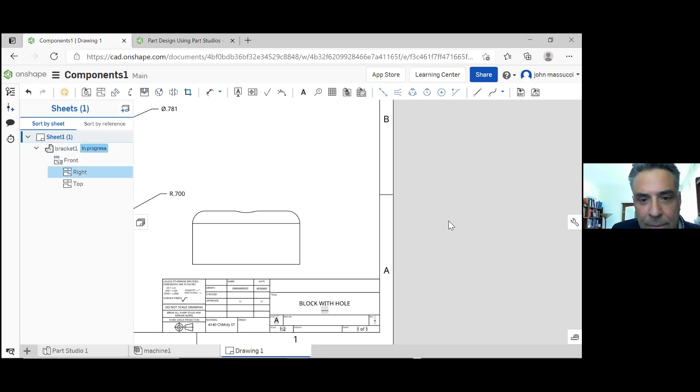Show hidden lines, there it is. Okay, that's what I was trying to show. Hey, how did you get it? Yeah, it's very subtle, you don't actually click it, you just highlight the box, don't click it, and then right click, and then there's the option to hide and show hidden lines.

The thing I wanted to show is that typically in these drawings, you want to show the hidden lines because it gives the machinist more of an idea. And then you would—this is drawing one—and then you would create another drawing.

The other thing you could also do is create this assembly drawing, right? You could create a drawing, we'll call it A, and then I'm done. We're going to open up for questions. It's been a while, you guys have been hearing me talk for over an hour.

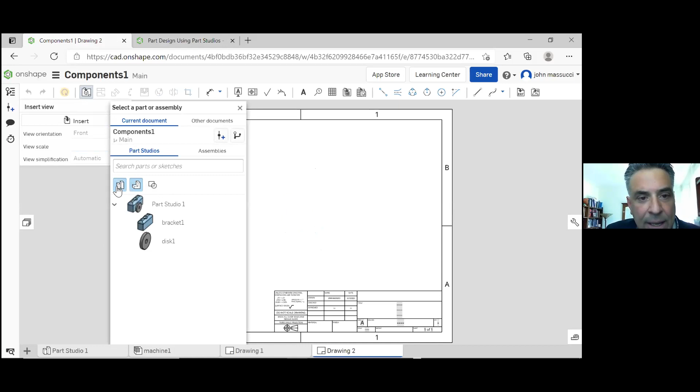But I just want to quickly show that you don't just have to show parts, you could go to assembly. You can go to assemblies up here, click on the assembly, and you could throw the assembly in here.

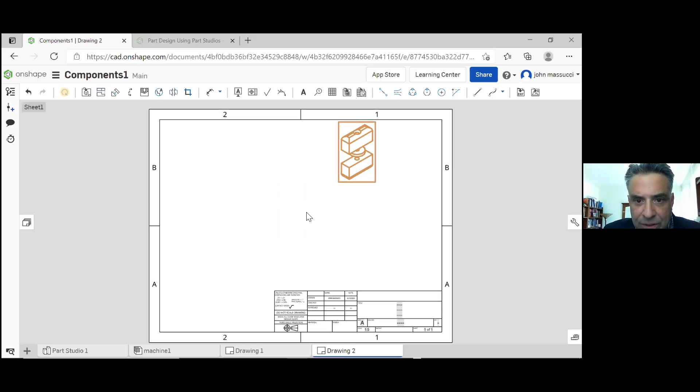And create an isometric view, we'll just leave it like that. So this enabled me to get out of this, and then I can get rid of this view, let's say, and hopefully it won't delete the other view. I could come here, move this into the center, highlight this view, change the view properties, and scale it. Right now the scale is 1 to 5, but maybe I could make it 1 to 2 or 3.

And it should be a lot bigger. Change the scale, and then if I wanted to convey this, I could have this assembly drawing. Okay, so anyway, that'll conclude the introduction to CAD on Onshape.

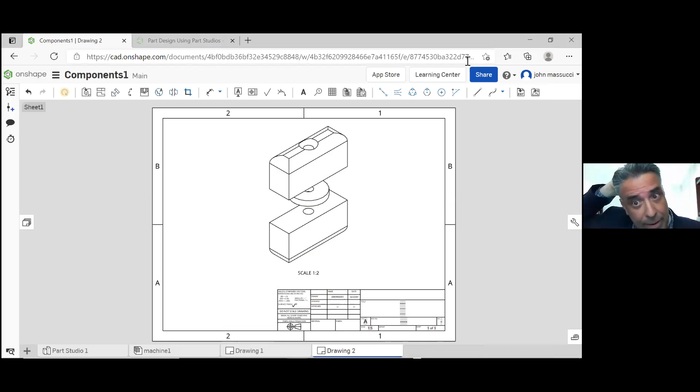Yeah, John, I've got a question. Oh, this is Bob. Hey, Bob. Man, this is really incredible, and it seems pretty robust. I just got on it with this call, and you described some really cool things, like essentially, okay, take some time to draw up your idea, and then obviously we can put it into this software. That's a part of the workflow, but what would be continuing on with it? Would this be able to, for example, be put into a CNC router file or something? Or can you share what that workflow might be?

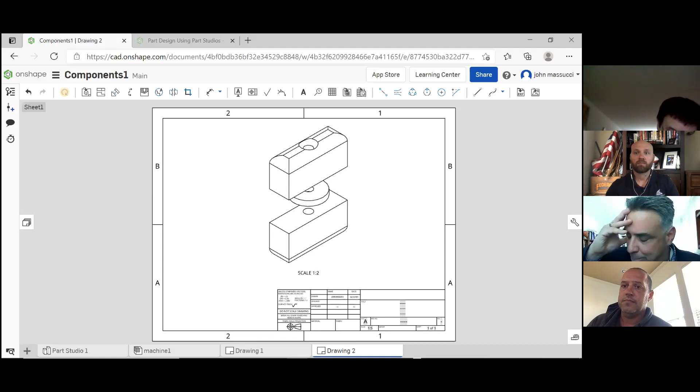Yeah, that's a great question, Bob. We didn't even think about that. And that's why it's really important. I appreciate the engagement, because we can't possibly think of everything, but that's a great question. So the other way you can, so you've created this geometry. One way to get people to understand your design is to send them drawings. And in some cases, that's the simplest way to do it, right? But if they're sophisticated enough and you have access to CNC or 3D printers, you can email. So what you can do is go back to your part studio, and your parts will come up.

And again, I'm working from a small screen, so I'm gonna just get this out of the way here. Okay, so now we're back to our parts. So what you can do is you can export these parts, let's say in the format that you can pull into the 3D printer. So see, I've highlighted my disk part. Let's say I wanted to send this part just as it is, as a solid part. I could export this part, and you see it comes up, and I can choose the format.

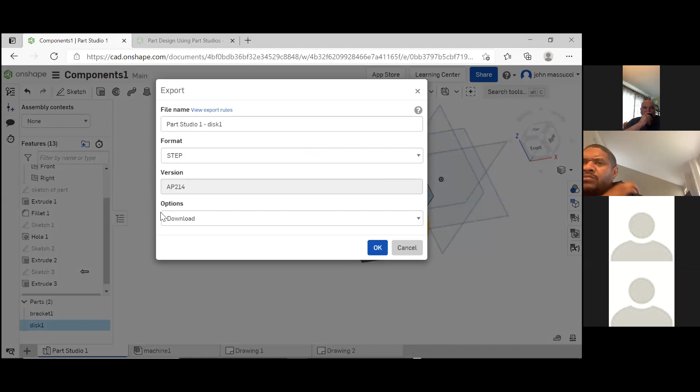Now, most people, they like parasolids, they like IGES, like if you're making a 3D printed part, a lot of times they like the STL file format, but you could consult the person who's going to be doing the machining for you. A lot of times that's the step file format. And then you click OK, and it's going to download that part, and you could see how it's downloaded the part for me. And I can open this up in a separate viewer because it's a step file.

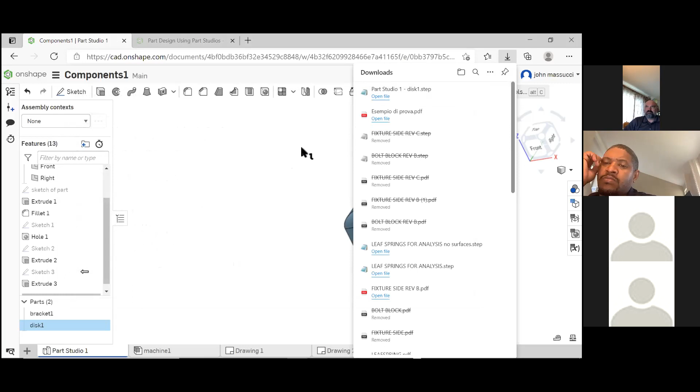So now, John, the thing that you wanted to mention was also, besides the learning center, the App Store, which opens up probably a lot of horizons for additional apps, whether it be CAM or analysis, right? Yeah, that's great.

Bob, so your question is triggering a lot of stuff that John and I had talked about but forgot, lost in the presentation. There's this other piece called the App Store, where you can take the geometry that you've created and you can create computer-aided machining. So there's these apps, and some of them are free, not all of them, depending on which one you pick, but that will work with Onshape to then, let's say you purchased a little mini 3D printer, or you purchased a little CNC machine. It would take your geometry and then create the machining program, all the commands to then machine the part out of a piece of material.

So the other point in this App Store is all the other applications that work with Onshape to help facilitate what you're intending to do with this design that you're working on. Some people, like bigger companies, it's important to manage all the data. We won't get into that. Some people need better simulation. So, maybe you'll have a question.